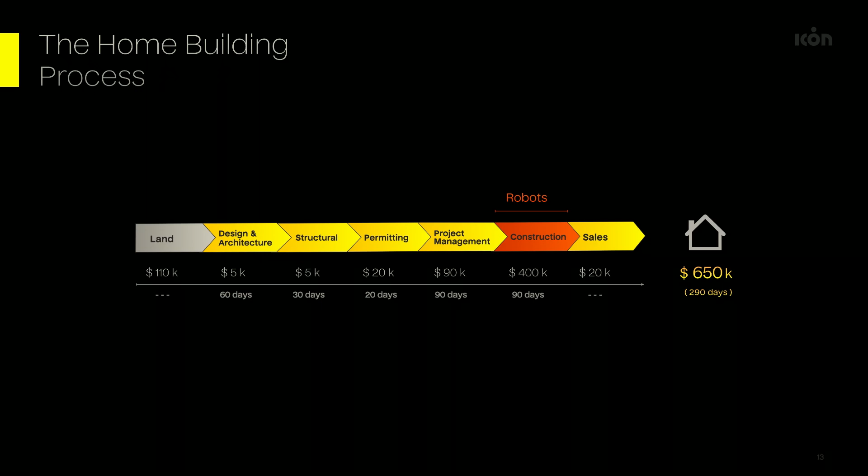And at Icon, we think we're gonna fix that with robots—profound automation that can do what automation has always done: increase the quality, increase the speed, and lower the cost. That's a complicated thing to say, like, which robots do you want to start with? Do you want a painting robot? Do you want a roofing robot? Do you want a siding robot?

If you look a little further and decompose the problem, it's actually the wall system that is the slowest, most expensive, most labor-intensive part of building a home. So we decided we wanted robots that build walls. Walls also create the form and feeling of a home, so it's a very powerful automation to begin with. I won't tell you all the robots and ways we looked at, but ultimately we landed on giant 3D printers as the way we wanted to build wall systems, because 3D printers had a simple, high-performance supply chain, labor could approach zero, and you'd leave a ton of design freedom still on the table.

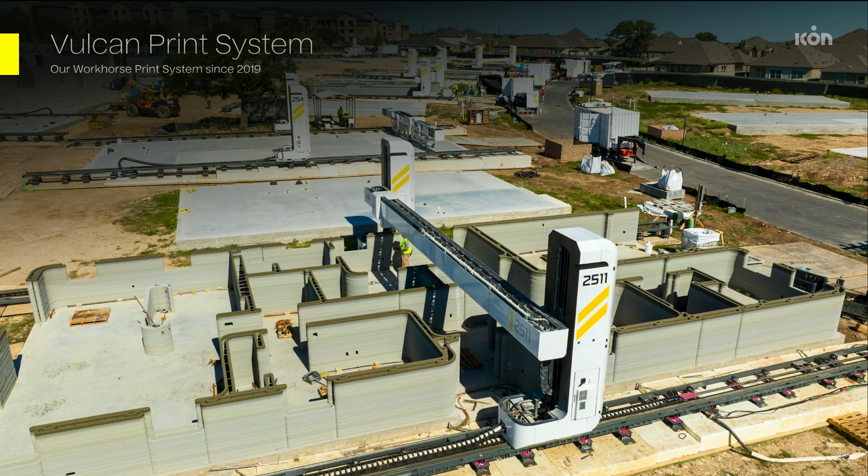And it's not just a pretty picture. There's a fleet of these printers deployed, 3D printing an entire neighborhood in Austin that we'll talk a little bit more about in a minute.

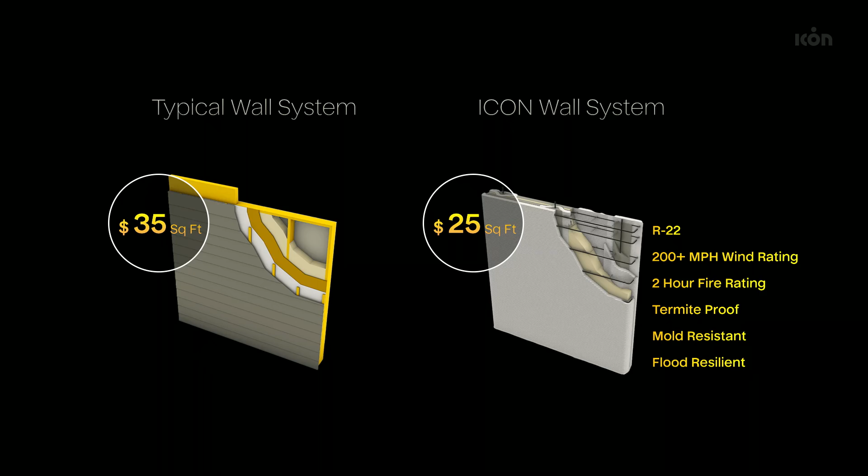Over the past few years, we have worked very hard for me to finally be able to stand on stages like this and say we are the fastest, most affordable builder of walls of any quality in the world, full stop. And it's not just that.

We've replaced traditional wall systems, but our wall systems are much more energy efficient. They exceed Austin Energy building code for energy efficiency by about 200%. They're stronger, safer, more resilient. They're better in every way. And rarely do you get something that is better, faster, and cheaper.

I think that's what we're onto. We kind of feel like we got a tiger by the tail, and we're pretty excited about it. We think it's faster, we think the cost is lower, and we think you can leave lots of design freedom on the table. People don't want millions or thousands of the same homes—it's a little too intimate, a little too personal.

It's industrially scalable because it's robots, high performance as I talked about, and it should approach zero waste. If any of you have been at a construction site, sometimes it looks like there's more waste than house. But with 3D printing, you print what you need to the drop, and then you stop. That's cool not just because it rhymes—it's cool because construction waste is a huge problem.

On this journey over the past 6 years, we started by delivering the first permitted 3D printed home in the world about 6 years ago. We then did a series of social housing projects for the homeless in Austin, and also down in Mexico for people living in deep poverty. In 2021, we entered mainstream housing in America—a big deal because we were able to get the homes appraised, mortgaged, and insured, so it was a lot of regulatory breakthroughs.

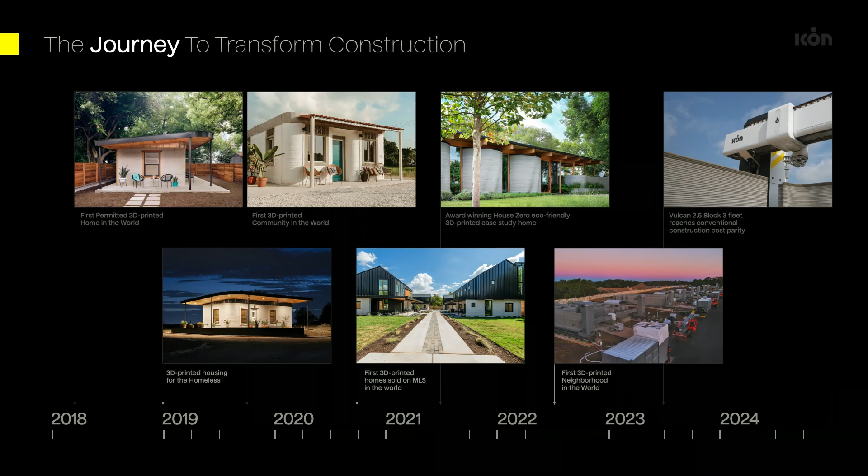We've continued to innovate on the kind of architecture that's possible with 3D printing, ultimately meeting and then exceeding the cost of conventional building, and now building at neighborhood scale. We've done about 200 buildings in total, everything from high-end luxury housing to really interesting public infrastructure—like a 1,000-person amphitheater we delivered in Austin, Texas. From the day the design was done to the grand opening at South by Southwest was 69 days for a 1,000-person amphitheater.

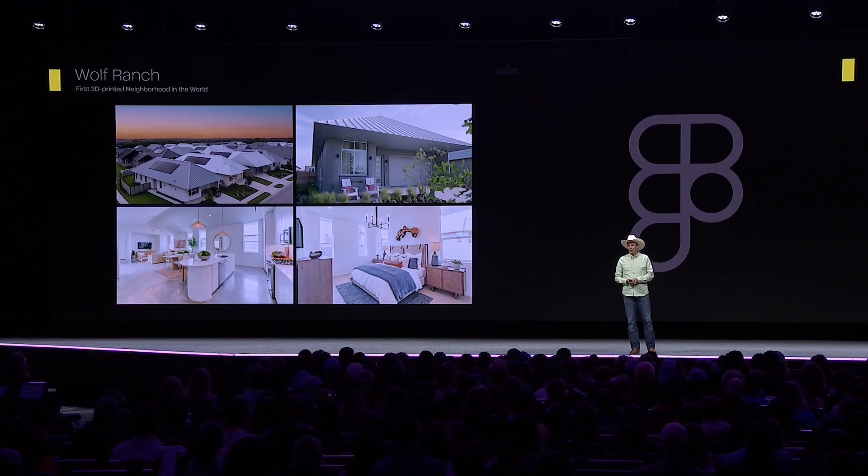Some affordable housing and homes for the homeless, and some pretty cool experimental stuff I'll talk about more in a minute. We really feel like we're moving. Here are some more pictures from the 3D printed neighborhood in the Austin metro area, in a place called Wolf Ranch. These homes are $50 to $100K cheaper than the median home price in Austin, and they include standing seam metal roofs and solar panels. These are pound for pound the best homes for sale in all of Austin—so if anybody's looking for homes in Austin, maybe talk to Lennar.

But we're not done yet—we've got to make it even cheaper. $10 a square foot is not enough; we really need to attack cost a lot more. What about two-story homes? What about multi-story? What about apartments? We've got to tackle that too. And what about the rest—the walls are cool, but what about the rest? We really want to squeeze more out of this automation: print the foundations, print the roofs, do things like that.

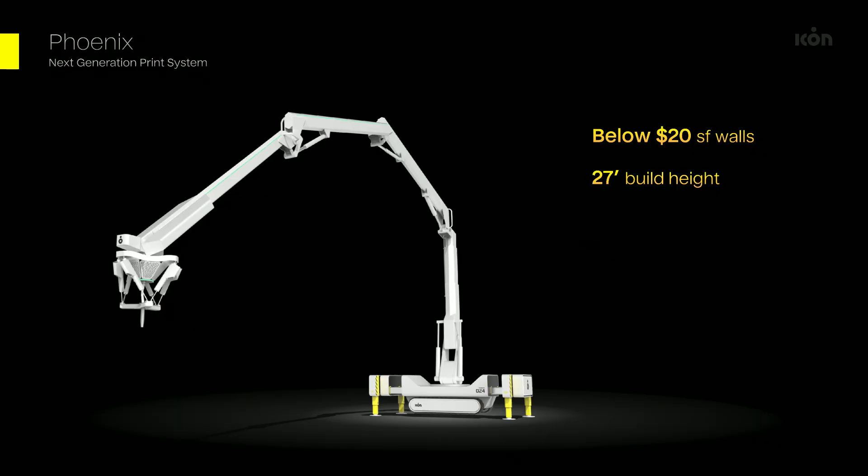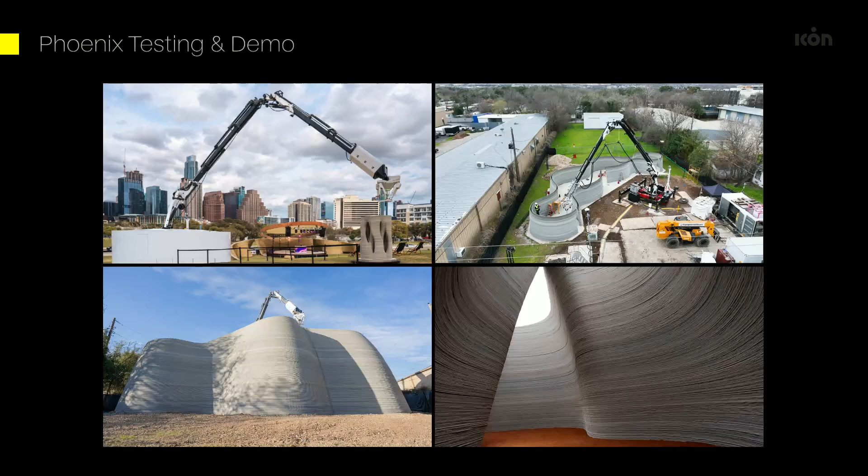So 100 days ago at South by Southwest, we unveiled our next generation printer that we're calling the Phoenix. Phoenix delivers the full shell—the foundation, multi-story wall systems, and roof—for about half the price of full shell delivery with conventional construction: 2 to 3 stories of printing, 24,000 square feet at a single print. Less than one person can operate a robot, meaning one person can operate 2 or 3 of these at a time. We're increasing automation all the time, and there's some pretty powerful software on board, so you know that wasn't just a pretty picture—I know we like pretty pictures here.

There's the prototype of that printer we showed off at South by Southwest, and the very first thing it ever printed. To give you a sense of scale, that building is over 100 feet long and almost 30 feet tall. It looks like it was put there by a race of alien priests or something—a very, very cool building. It makes you realize the world could be so much cooler than it is, and we've probably stopped dreaming because conversations about housing are so depressing. But this thing is cool. It looks like it cost $5 million and probably would cost that much, but in fact it was closer to $150,000, and that was the first time we ever tried. Pretty cool.

So what's next? We're liking the robots, and we think there's a lot more robots in our future. But we've got to attack the rest of this problem if we really want to move the needle all the way. I'm dreaming about homes that are twice as good in half the time and half the price—that'd be the kind of revolution and breakthrough we need to get this thing back on track. So we're going to have to think about the things that happen before and after construction as well.

These are information processing problems, they're software problems. This is where our partnership with Figma has been so important to us—finding ways to develop these advanced technologies in very human-centric ways. And because I'm here at Figma, I want to highlight specifically our work on this moment of design and architecture.

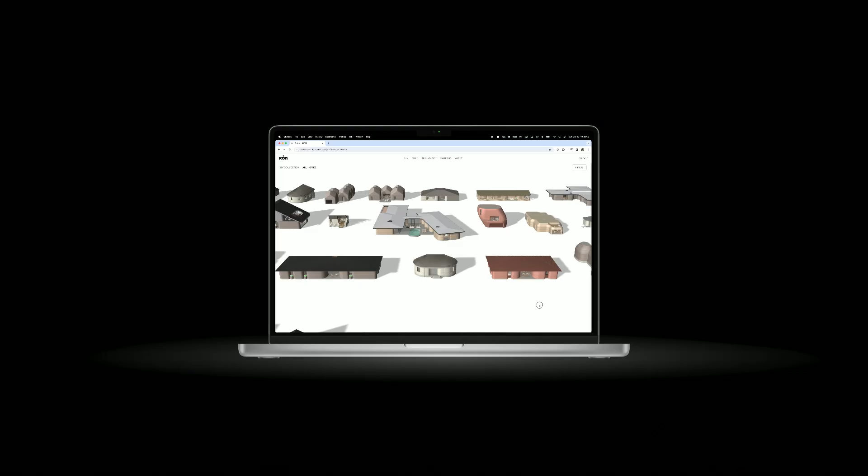Right now, it's about 60 designs - 1-bedroom homes, 4-bedroom homes, 2-story homes, fire-resistant homes, hurricane-resistant homes, homes as low as $99,000 to build, you heard that right, all the way up to homes over $1 million to build.

We're adding new designs to it all the time, and we've opened up the platform to architects all over the world. If you upload your designs into the catalog, when we build them, we'll pay you. We think this is how you get high-integrity architecture that's ready to go - you click what you want, and we tell the robot to get to work.

Maybe this is a better way to build homes, both more resilient, more sustainable, and affordable, but also that keep beauty and human value at the table. So we're pretty excited about this.

The other tool we've built, leaning on what Figma has given us to push pretty hard in this, is that we've been very quietly for 2 years developing an AI tool that knows how to design and build buildings. It's an AI architect, effectively, but also with the sensibility of a project manager or a general contractor.

So what that means is you go from very natural human inputs - here are homes, here's pictures of houses I like, here's my budget, here's where I want to build it - and what you get are designs that can actually get built. It's not just an image generator.

We've had to assemble and label and train a massive amount of data on floor plans, building documents, architectural plans, so that it has a sensibility of what's possible to build, what won't defy the laws of physics, what we actually have the technology to build.

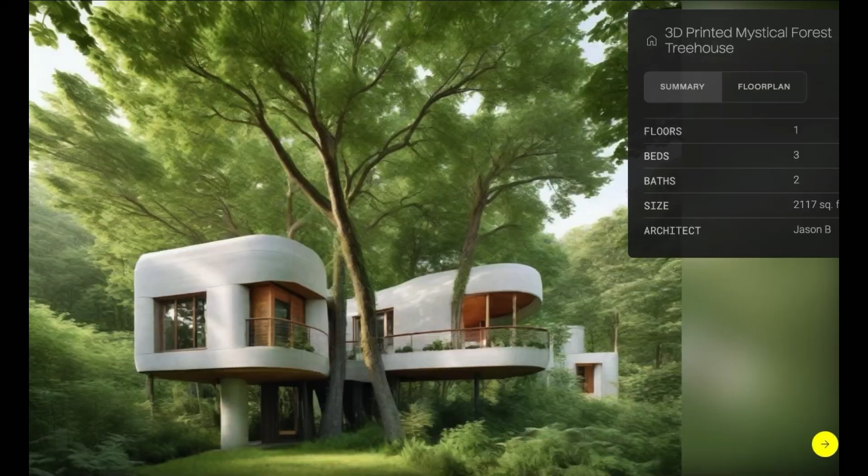We weren't sure we were going to release it this year. But then I got this image back in about January or February of this year when I was playing with it. I have a thing for ranches, no surprise, and tree houses. I was working with tree houses, and all of a sudden I told it, 'that's a cool tree house, make it 3D printed.' And it gave me this, and I thought we'd finally crossed some kind of line.

Let me tell you why. Number one, there are no 3D printed tree houses in the world. It did not find this in its data. It made this, it intuited this. And more than intuited this, it understood something - it knew that a tree could not bear the weight of concrete, so it detached the building from the tree and put support pillars underneath it. And I was like, my God, we've done it.

This is worth putting in front of the people and worth putting out to the world. So we decided to release a beta version that only does concept generation at this point.

But 9 months from today, and you can kind of track our progress, we are going to release the full end-to-end tool, which from natural human inputs will output architectural concepts that you can then iterate on, including in their finest details. And when you are ready, you will get construction documents, permitting information, budgets, and schedules from single sessions and natural human inputs. I think it's going to be pretty incredible.

We're pretty excited, yeah, thank you.

These are just some of the things people are designing right now. The concept generator will give you floor plans, elevations, exterior renders, and interior renders that are coordinated, more or less - it still hallucinates a little bit. And it's very cool what people are producing with the tools so far.

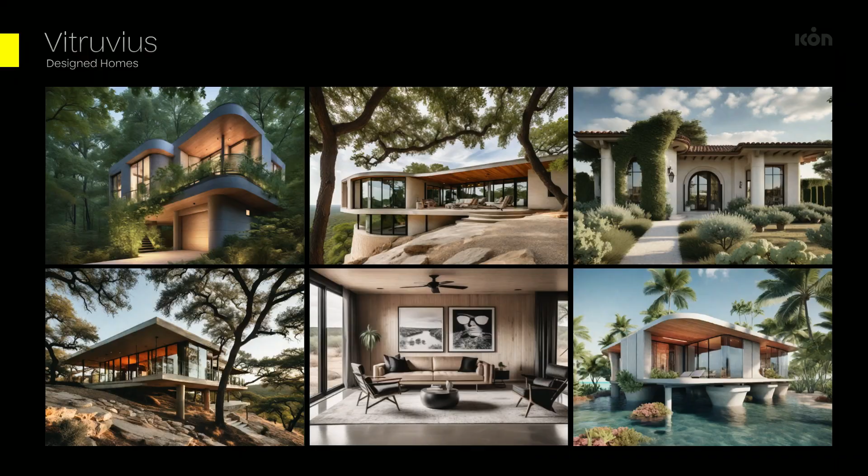In fact, we have somewhere between 10 and 15,000 users - I'm realizing right now I should have checked the number before I came. But Vitruvius will produce this year more novel home designs than all the architects in America put together. And we're not even really trying to push the user numbers much right now.

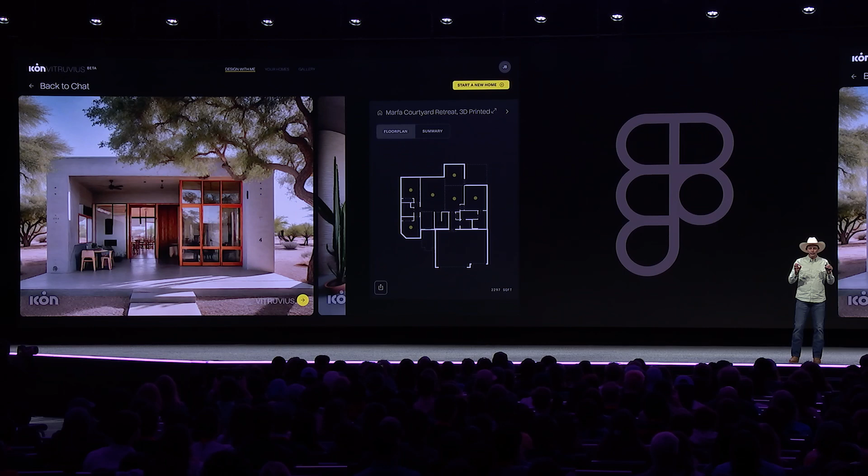Just a few examples. This was a courtyard house in Marfa. If you've ever been to Marfa, Texas, it nailed it - this is exactly the local design vernacular. This would not belong in Charleston, South Carolina. It belongs in Marfa, and that is for sure the Chihuahuan Desert, complete with mesquite trees.

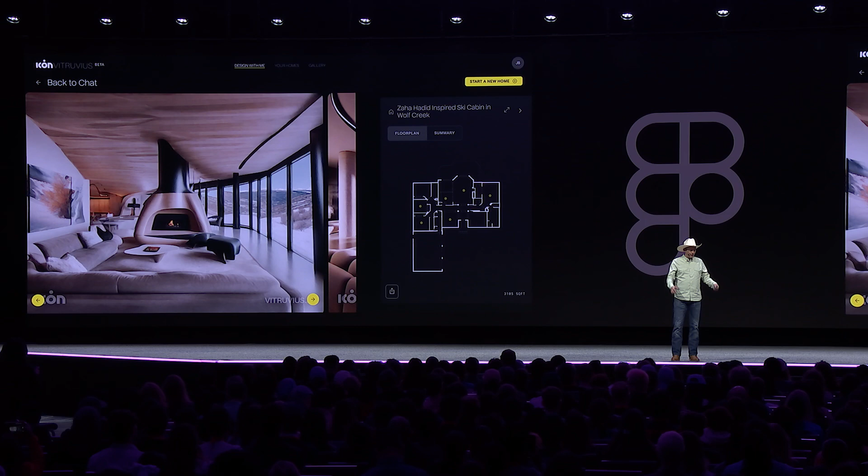Like, it really understood what it was trying to do. Zaha Hadid, one of my favorite architects - if you say a Zaha Hadid-inspired ski cabin in Wolf Creek, I didn't even say mountains, it knew Wolf Creek is in the mountains. And that's very much in the spirit of the way Zaha Hadid would have designed. It really has a deep understanding of architectural history. And then a futuristic moon base home in Austin, Texas, really drawing deeply on the design languages and vernaculars of sci-fi literature and things like that.

So these are a few of the examples that Vitruvius is producing. But right now it's surfacing these results kind of the way you'd get them from a human architect. It's like you go to an architect, you hire him, and he brings back one to three concepts, shows them to you, you can kind of play around. But Vitruvius is doing so much more than that, actually.

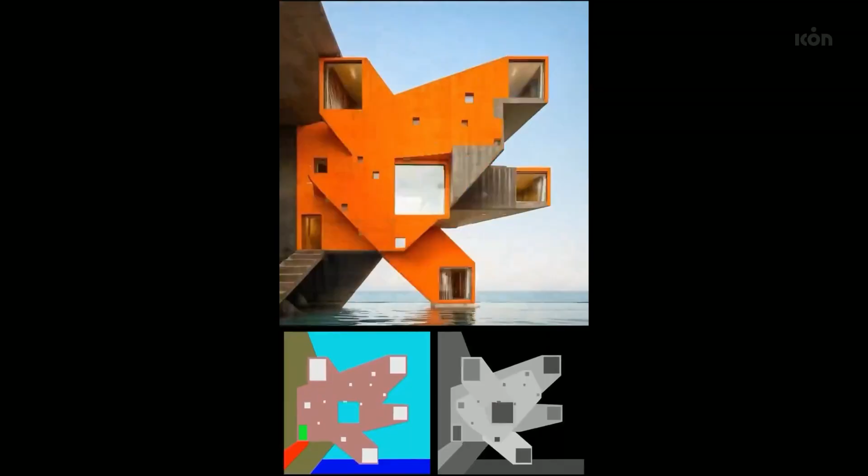And Figma has been invaluable, and I think when we finally get there, we'll owe a lot to the Figma team, because what Vitruvius is actually doing is exploring a massive design space. And trying to figure out how to put human beings in contact, in touch with these very powerful tools in a usable way is the frontier of UI UX design right now.

And there was a temptation on those previous slides just to show it to people the way a human architect would do it. But there's something here, but there's also something unusable about this. But it does give you a sense of the raw power of the thing, doesn't it? Like, holy Moses. So more to come on that.

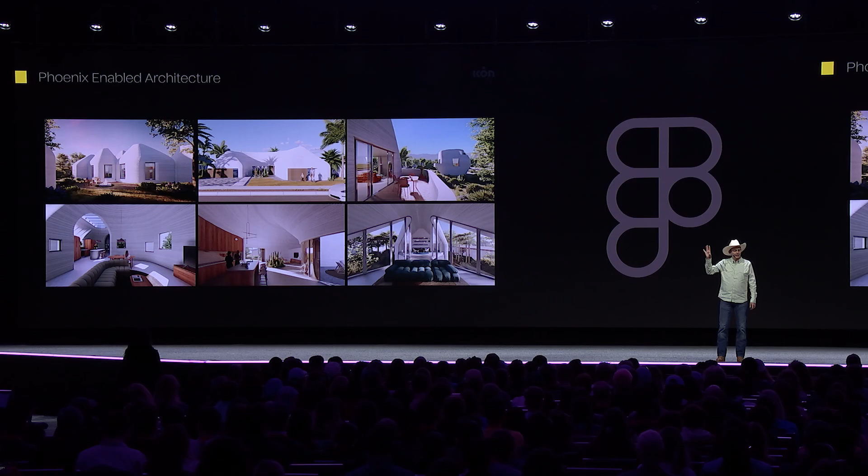But ultimately, with the technological progress we make, the kinds of homes at every price point that we're able to produce with this technology - those are over on the top right there, a multi-story affordable unit - that's cool, it's cool as shit. Like cool domed houses, it makes me excited. It allows us to start entering higher density multifamily kind of markets.

The next project we're doing is this cool project out in Marfa, Texas, with this woman. She's like a design legend in Austin, in Texas. Her name is Liz Lambert. And she has really understood and embraced the possibilities of 3D printing. So it's hospitality and high-end luxury housing and a bunch of affordable workforce housing in the town. It's a very cool project.

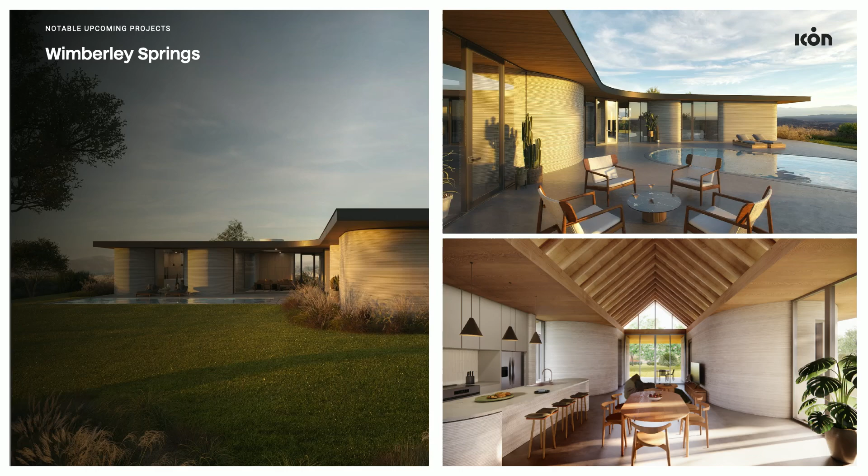That Codex I just told you about, we've had the first homes from the catalog ordered that we're going to start construction on in 60 days because the designs are already ready to go. And this is a project we're doing in a high-density area of Austin later this year. Half of these units are affordable units, and this is not the affordable housing that we're used to.

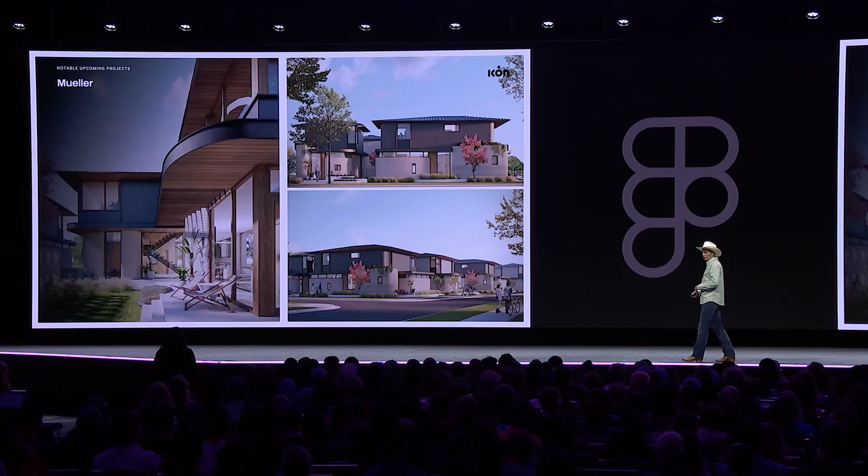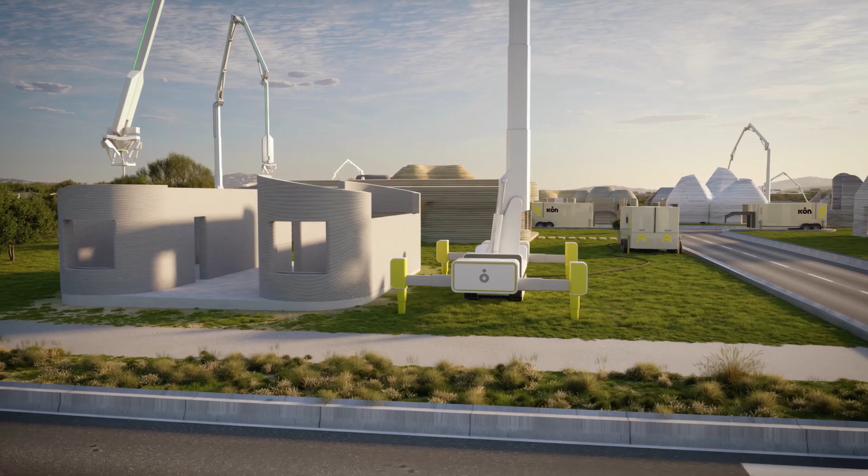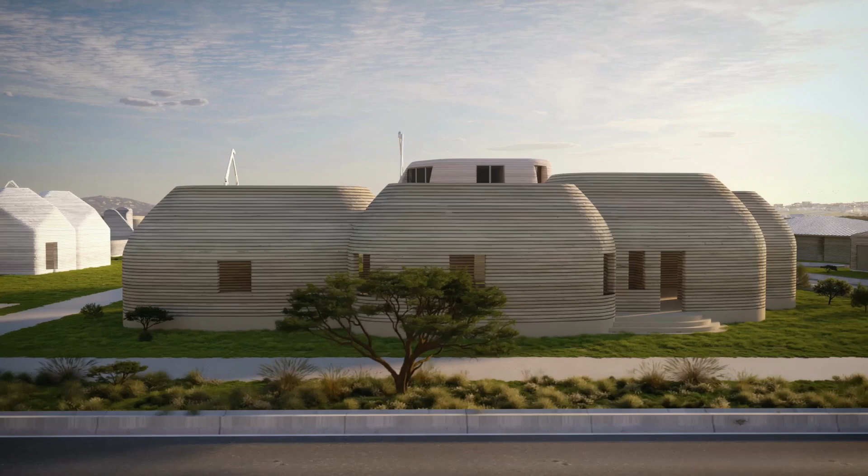And so ultimately, we think by holding together high design and high technology and forcing them to cooperate instead of compete, that AI systems and robotic systems are going to build not only homes, we're going to build neighborhoods and villages and towns and one day cities, and that dignified housing is going to be abundant in this world, that we will live with our own eyes to see an end to the global housing crisis, and that even though we're using AI and robots, if we can keep our values and design at the table, this world will be more human and not less.

And so maybe the end of my parable here for all these designers and makers and creators and dreamers and entrepreneurs in the room is insist. Design is not the pretty thing you do at the end. Your values are not the thing you get around to if you can work it into the project. We have to fight just as hard to hold beauty and our deepest values and highest inspirations in our work and to fight like hell to make those things real in the world.

I am so excited to see what you are going to build. I feel a great kinship with people like you in this room. It's time to build and we got to go fast. Zoom, zoom, we ride. Thank you.